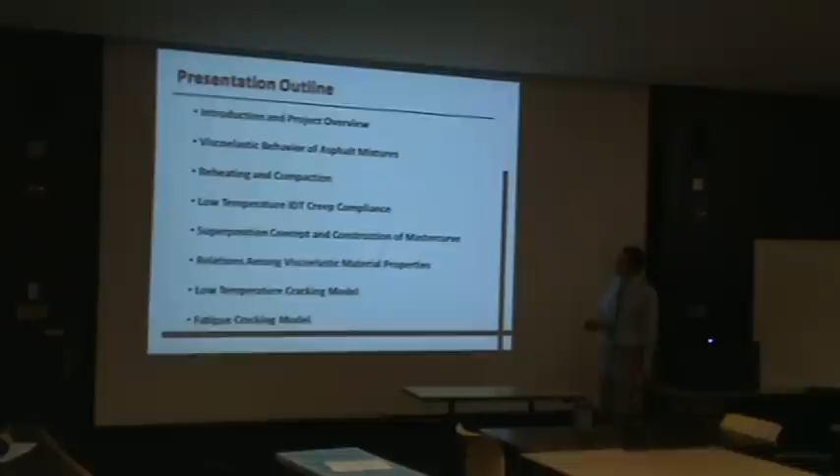This is the presentation outline. I'll talk a little bit about introduction.

What is RAP? RAP is reclaimed asphalt pavement, recycled asphalt. The RAP is generated when they mill old pavement, and then they move the RAP to landfills.

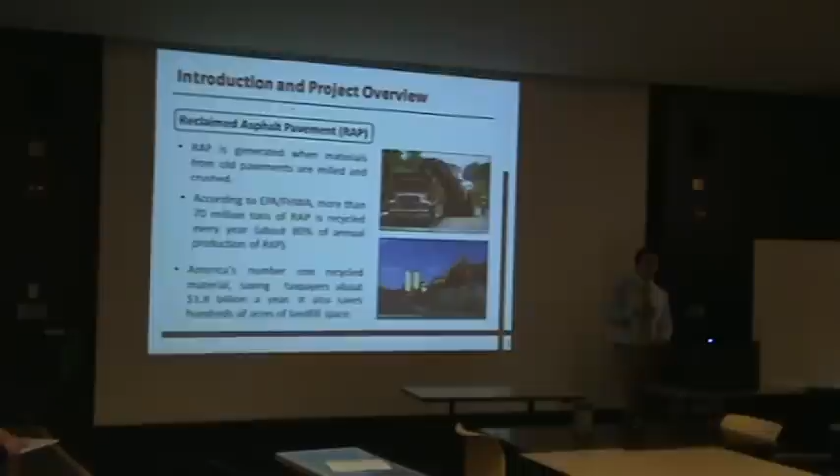According to EPA and FHWA, more than 70 million tons of RAP is recycled every year. About 80%, which makes it the material number one to be recycled in the US. And it saves $1.8 billion every year and hundreds of acres of landfills.

My project is about high RAP, not regular RAP. What's the difference? When we talk about RAP, it's whatever less than 20% RAP in the new mixture. Anything above 25% is called a high RAP mixture.

Actually, recycling started in 1970. The DOTs nowadays are very comfortable with recycling low content of RAP, less than 20%.

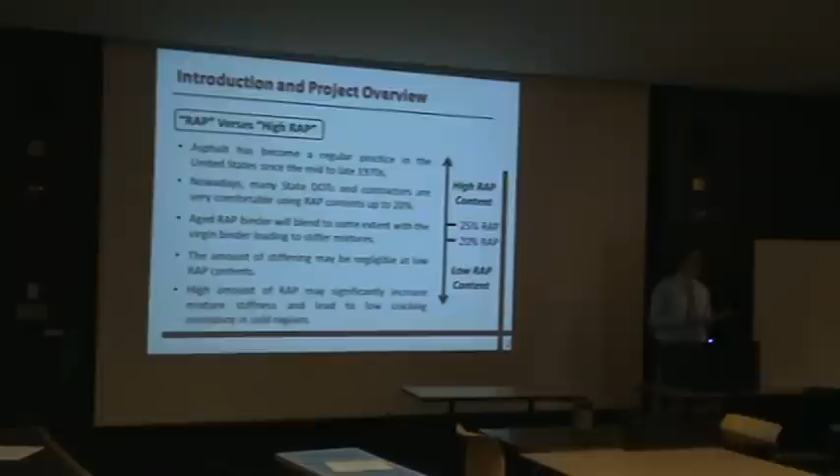But at low RAP content, the blending between the binder of the RAP and the virgin binder in the mix tends to make the mixture stiffer. The amount of stiffening at low RAP content will not affect the overall behavior of the material. However, at high RAP content, the blending and the stiffening of the material will be significant.

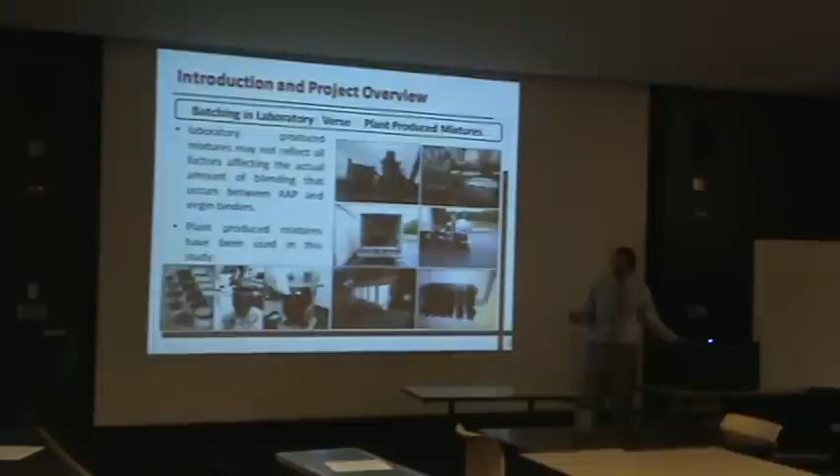In my project, I was using plant-produced mixture instead of batching in laboratory. What's the difference? The regular procedure of research is doing batching in laboratory. They make sieving, and then they add the RAP, they add binder, and then they mix. So they prepare the mixture in the lab.

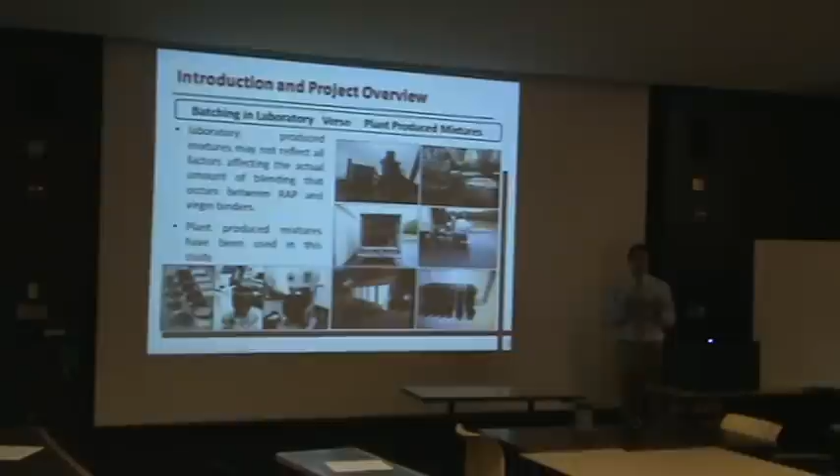However, the blending between the binder in the RAP and the virgin binder depends on a lot of things that happen in the plant itself. It depends on the mixture type, the amount of mixing, the temperature of mixing, and the plant type. So all this stuff, if we are using batching plant in laboratory, will not be representing the real pavement.

The material I used here came from 3 different states: New York, New Hampshire, and Vermont, from 2 different companies, and I used 2 different plant mixtures from batch plant and drum plant.

And I used 4 different binder grades, which is the grading by Superpave for the binder, and I used different amounts of RAP in the mixtures. So I used 0, virgin material, and then 20%, which is the regular practice nowadays, and then I wanted to see what would happen if we used 30% or 40% instead.

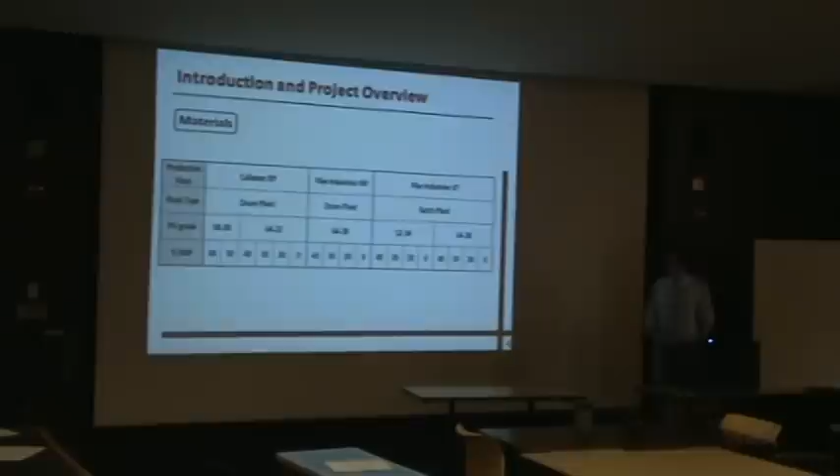What is the problem of RAP and what's the problem of stiffening the material? Material which is stiffer will tend to crack faster. So low temperature cracking and fatigue cracking will be a big issue.

And also, this project was especially for northeast of the US, and the northeast is a colder region, as you know, and rutting gets more susceptible in hot regions.

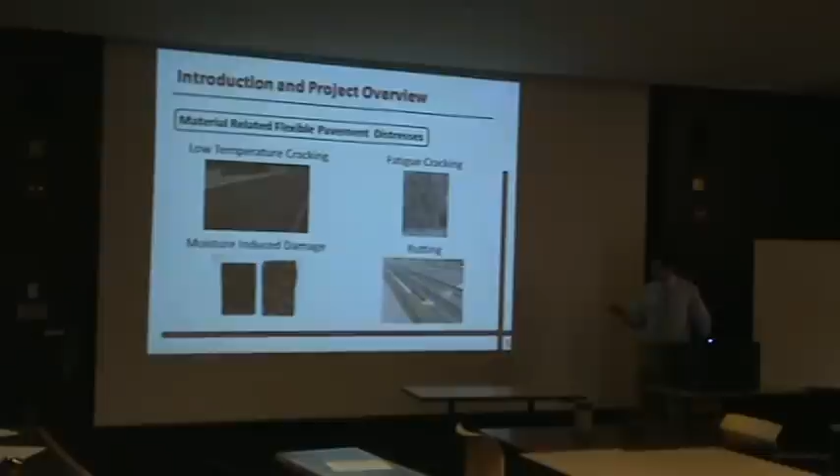This project was a pooled fund project, and we were working with North Carolina State University, UMass Dartmouth, and Rutgers University, Pike Industries Recycling, and FHWA. So this is the overview of the project.

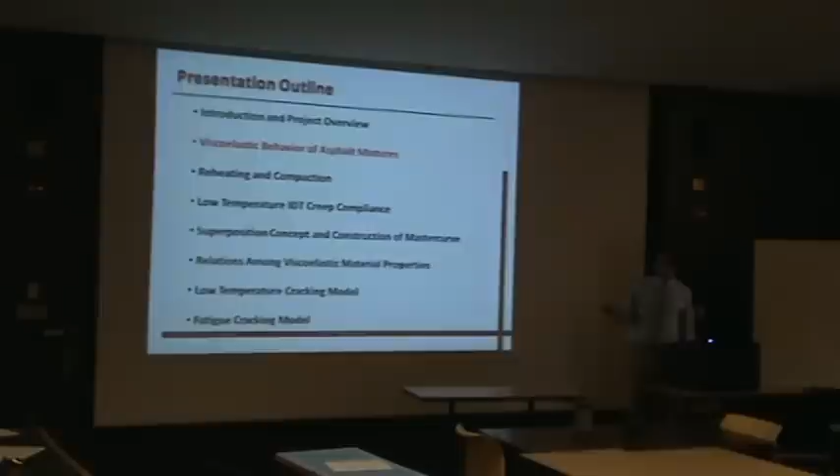I want to talk about the viscoelastic behavior of asphalt mixture. Actually, when we talk about any civil material we used to use, it's elastic. So the deformation depends on the stiffness of the material and the applied load.

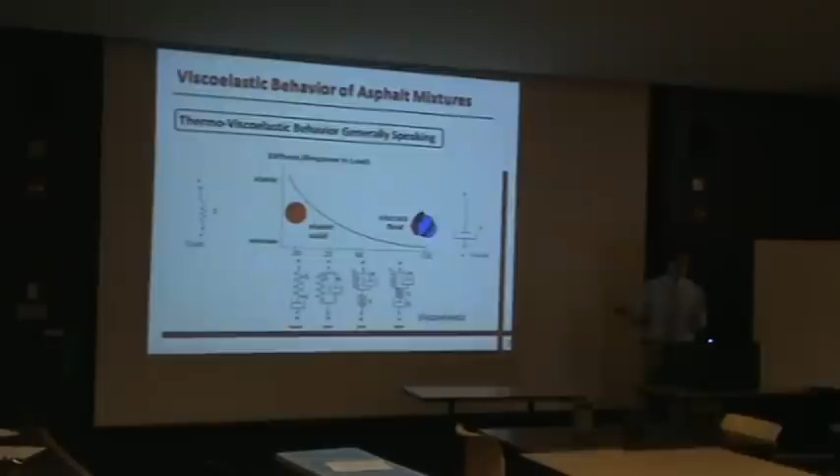However, asphalt is a viscoelastic material. So it's not pure elastic, it's not pure viscous, it's something between. And it depends on the temperature. So we call it thermo-viscoelastic material.

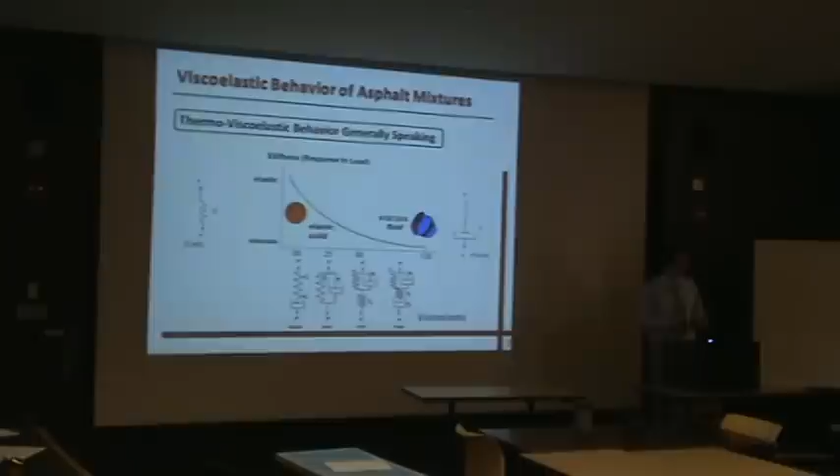At lower temperature, it tends to behave like rubber. At higher temperature, it tends to be a viscous fluid like honey or any viscous fluid.

It's not only dependent on temperature, but it also depends on time of loading. So we are not only concerned about the magnitude of loading, but we are concerned about the time of loading, because the response of the material after 1 hour, for example, at 25 degrees C will be that much. After 10 hours, it will be that much. So the deformation, for example, under any load will be dependent on time of loading itself.

So now we have 4 things: we have the magnitude of loading, we have the temperature, we have the stiffness of the material, and we have the time of loading.

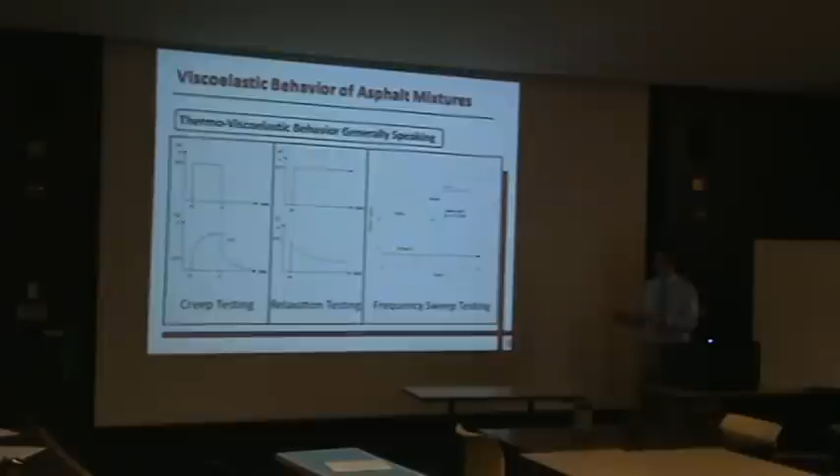So when we test this material, we need to control the load or the deformation, plus we have to control the temperature and the time of loading. That's why, for example, to test a viscoelastic material, we have creep test, relaxation test, and frequency sweep test. All these tests involve controlling temperature and controlling time of loading.

In creep test, we apply constant stress, and the strain will increase with time. At relaxation, we apply constant strain, and the stress will decrease with time. In frequency sweep testing, we apply sinusoidal loading, so the stress will be sinusoidal, and the strain will be shifted a little bit from the stress. There is a time lag, which is another property of the viscoelastic material, between the stress and the strain. So these are the tests we use for viscoelastic material.

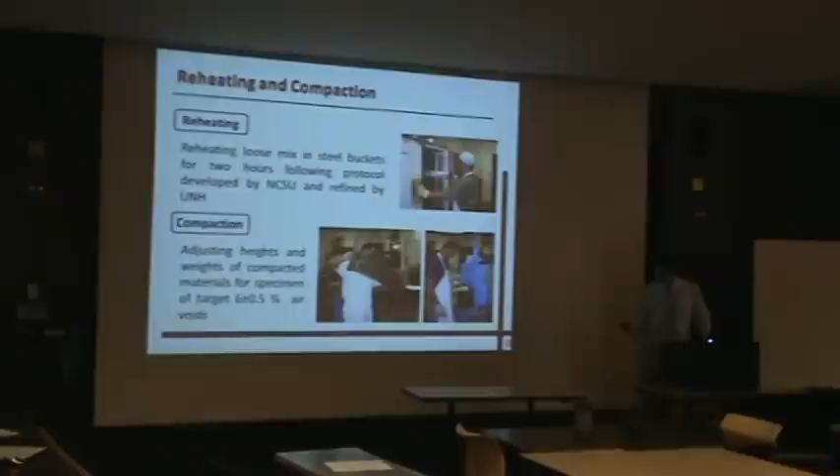Preparing specimen in lab: I get the material from the plant, it's mixed in the plant, in a steel bucket, airtight, and then I reheat it in the lab for 2 hours, following protocol by North Carolina State University. Then we compact the material. When I compact by the gyratory compactor, I adjust the height and the weights so that I can get 6 plus or minus 0.5% air voids.

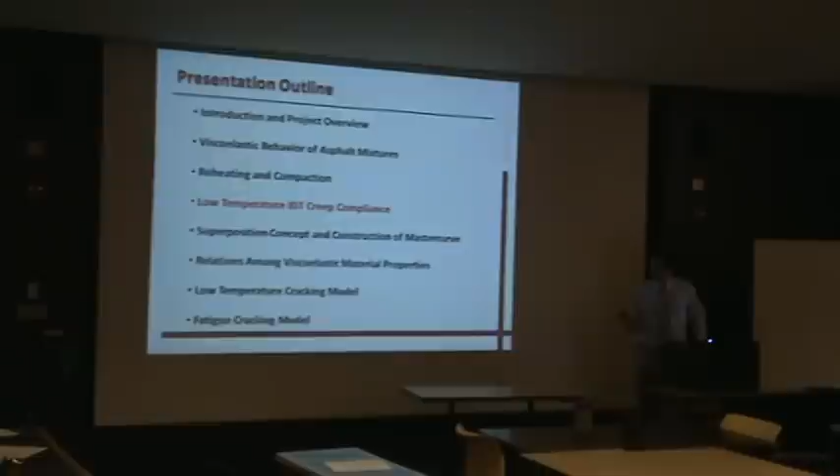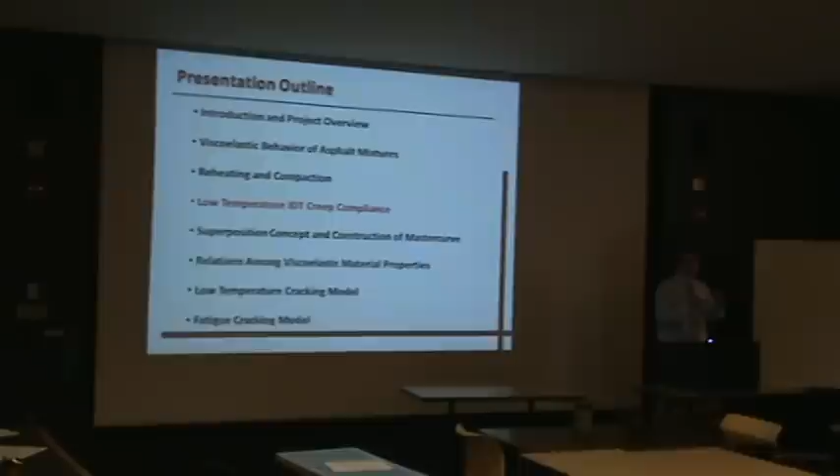After that, the first test I'm doing is the creep test, which I use the first specimen for. In the creep test, I apply constant stress and read the strain, and I expect the strain to go up a little.

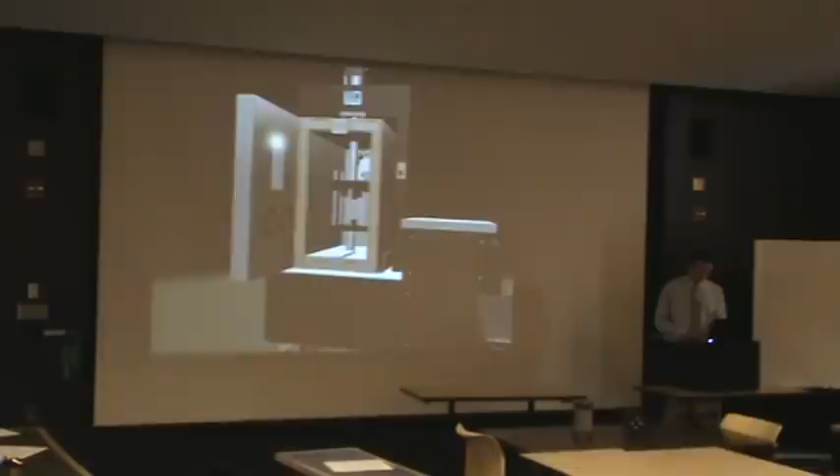We use nitrogen gas to cool down the temperature chamber. This is the jig, and we put the specimen inside this jig, so it's an indirect tension test. We apply compression in the vertical direction and get tension in the horizontal direction.

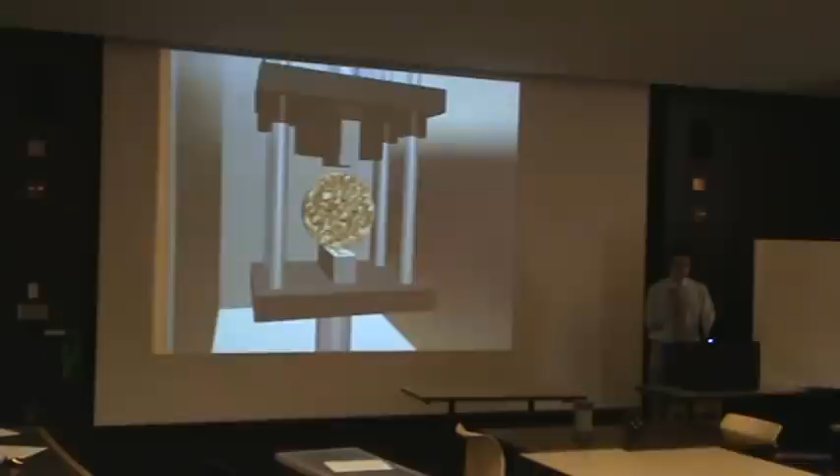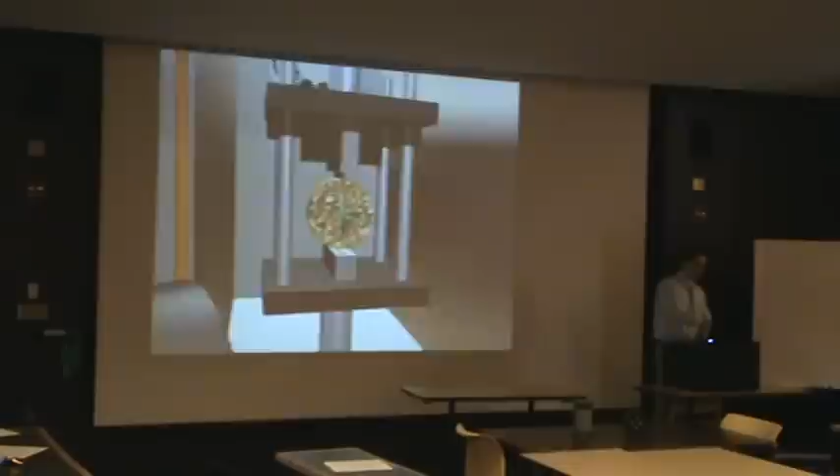Then we mount the LVDT, linear variable transducers. In the picture this is a resistive transducer, but we put LVDT on the specimen. Then we read the testing, the vertical and horizontal deformations on the specimen.

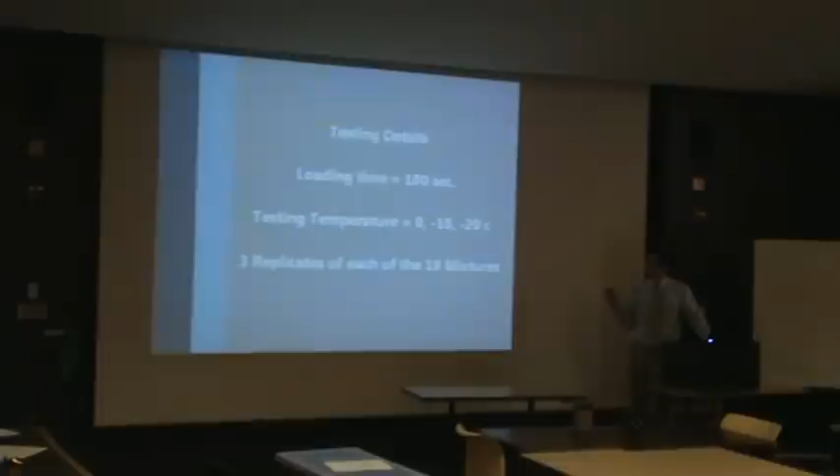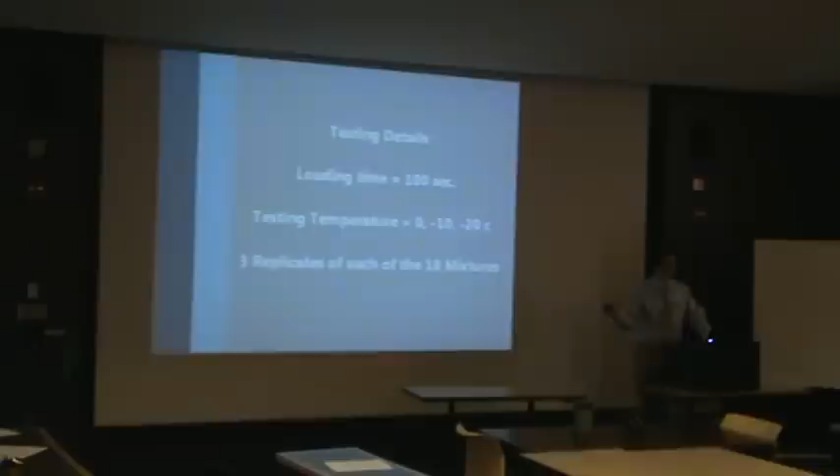The testing details: loading time will be 100 seconds, so we control the time here for 100 seconds. Temperature - I will repeat the same test at 0, -10, and -20 degrees C, and then 3 replicates are used from each mix. I have 18 mixtures, so 3 replicates times 18 mixtures, done at 3 different temperatures.

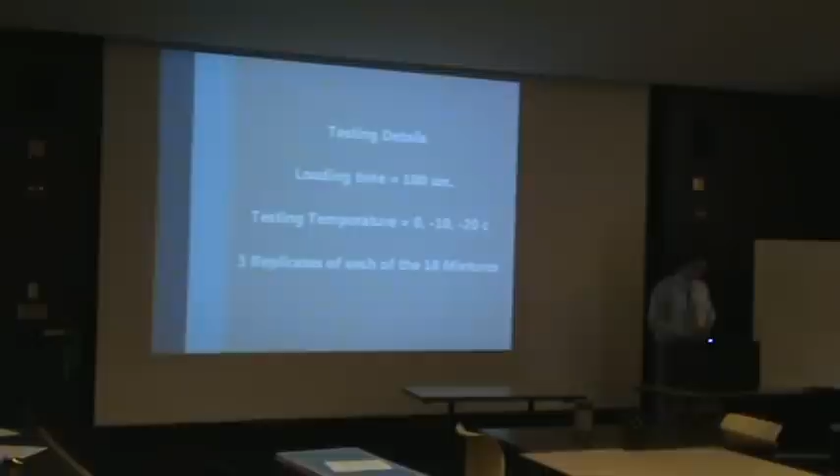The other thing I'm very picky about is choosing the load. I'm not choosing the same load for all mixtures and replicates, but I choose the load which gives me a horizontal strain not more than 300 microstrain and not less than 50 microstrain. Why? Above 300 microstrain, the material will not be linear viscoelastic, it will be non-linear, so I want to avoid this non-linearity. And why more than 50 microstrain? To differentiate between the signal itself and the noise in the system.

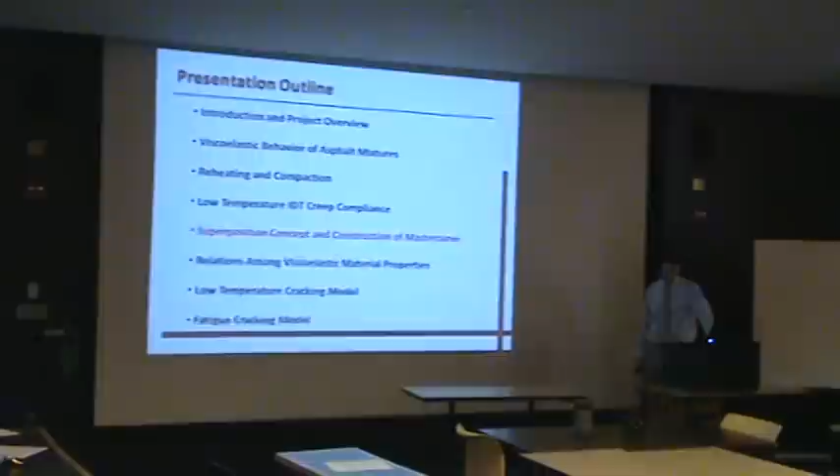The other thing I want to talk about, after I do the creep test, there is something called the superposition concept to construct the master curve for creep.

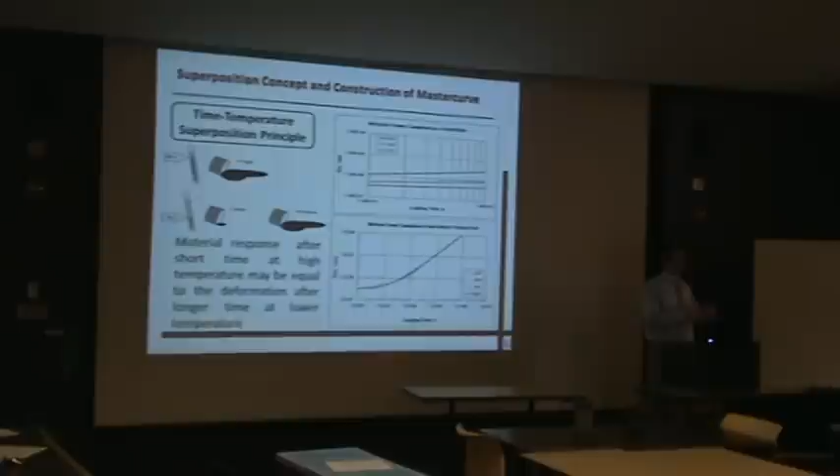Again, the same picture - I like this picture. The behavior of the material depends on temperature and time, but there is something called the time-temperature superposition principle, which means the response of the material could be the same under high temperature with short loading time versus lower temperature and longer loading time. So I can shift the curve. Those are the 3 curves I get from 0, -10, -20 degrees C testing, and then I can shift them using time-temperature superposition. Instead of talking about time, I use something called reduced time, which is imaginary, so I can take into consideration the time-temperature superposition.

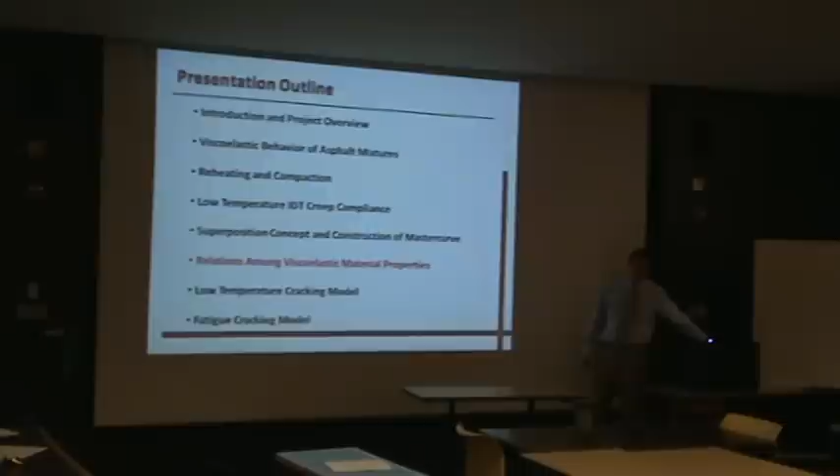After constructing the master curve and applying the superposition concept, there is some relation between viscoelastic material properties. As I said, there is creep test, relaxation test, and dynamic modulus from cyclic loading. Actually, the 3 properties are material properties, so they should be related.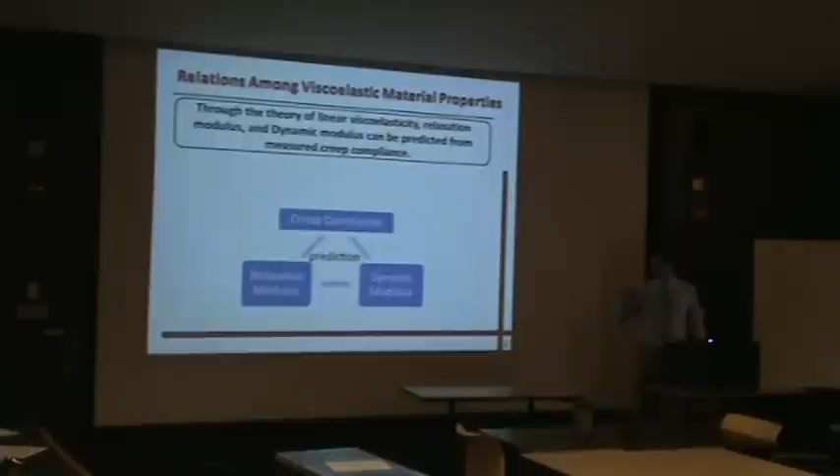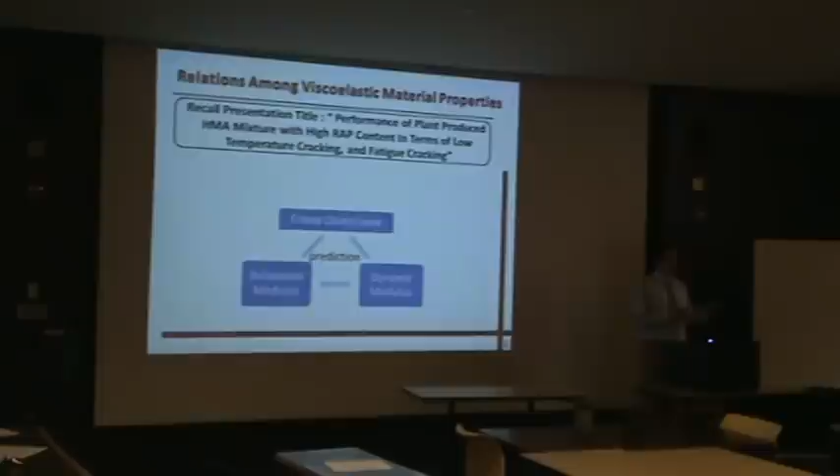There are mathematical models to predict or use creep, relaxation, and dynamic modulus interchangeably between the three. After I get the creep data, I predict relaxation, I predict dynamic modulus, and after these predictions, I have all three.

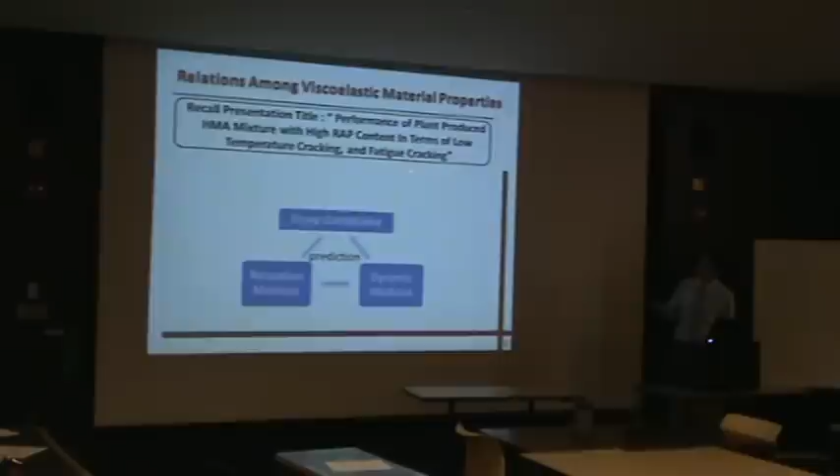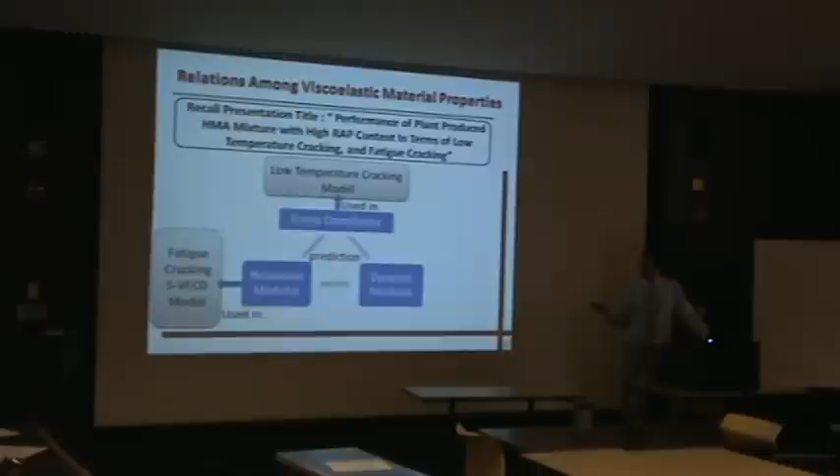So what's the reason for all this? Going back to the title of the research, it's testing the performance of these materials in terms of low temperature cracking and fatigue cracking. I'll use the creep compliance in a low temperature cracking model, and the relaxation modulus in the fatigue cracking model. So now I have low temperature and fatigue covered.

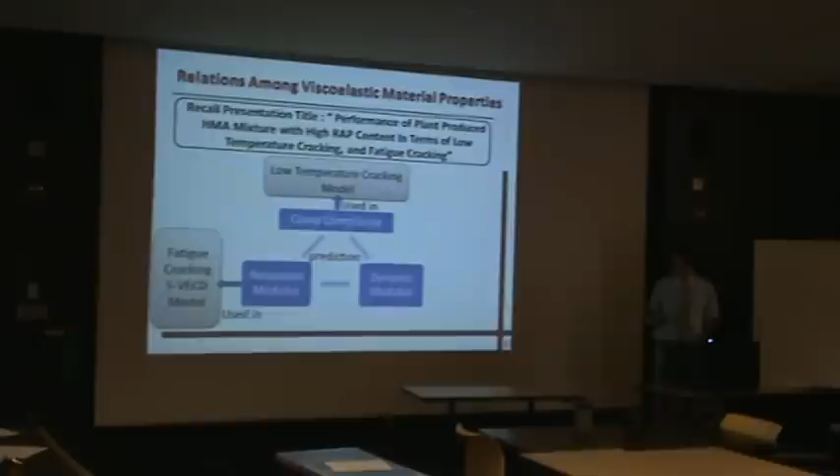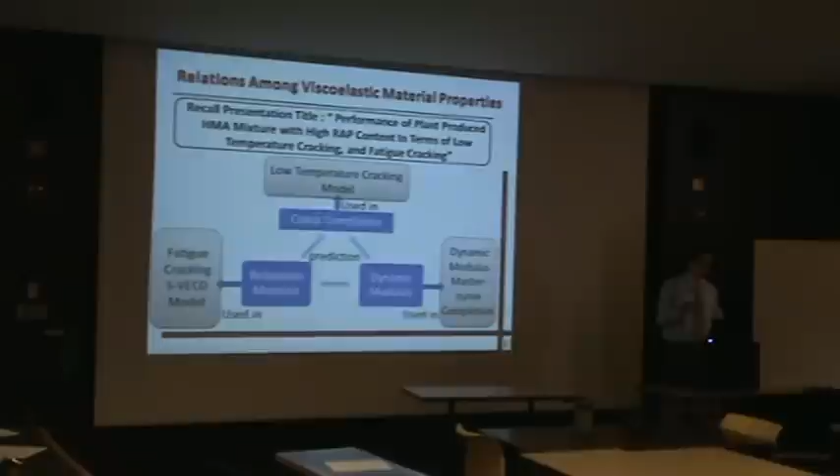Why do I need the dynamic modulus? I get the data for dynamic modulus from Rutgers University, and their machine can't go down to -10 or -20 degrees C. It only goes down to 4 degrees C. So I use the dynamic modulus predicted from the creep at low temperature to complete the dynamic modulus master curve, using the superposition concept I just talked about.

This is the model for the crack. The tensile stress comes from contraction of the pavement - this part tends to contract, that's why the stress happens, and the stress will be higher at the top of the pavement.

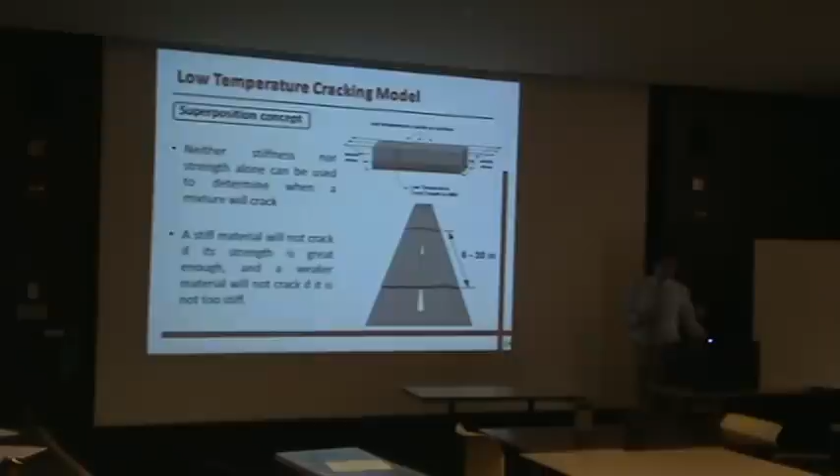Neither the stiffness nor the strength of the material alone can characterize the cracking properties. I have the stiffness from the creep test, but I don't know the strength. Why can't either one help with the cracking model? Because a high strength material may not crack if it's flexible, and a weaker material will not crack if the stiffness is not very high.

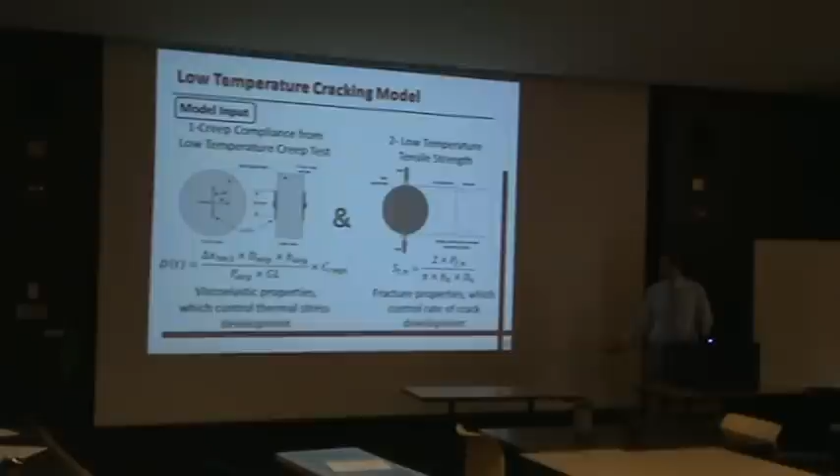So besides having the creep compliance test, I have to do a low temperature tensile strength test, also on the same specimen, doing IDT test again, but at negative 10 degrees C, applying monotonic loading until cracking of the specimen. So this is the low temperature cracking.

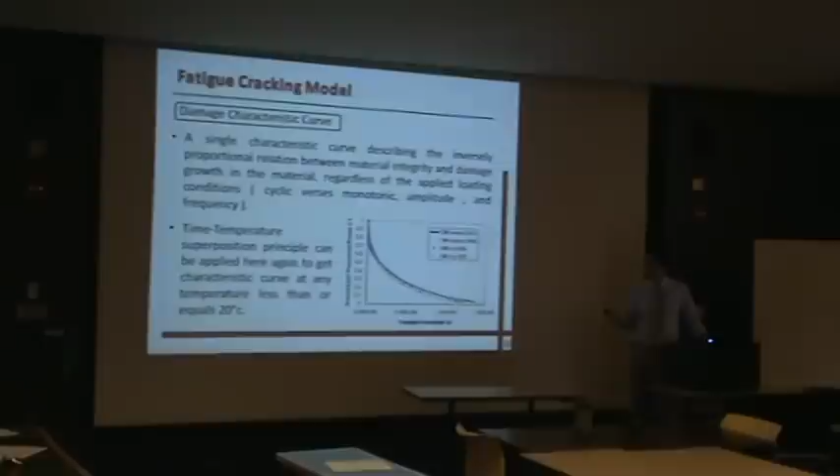For the fatigue cracking, the advantage of having the model is to get something called the characteristic curve, C versus S, which describes how damage will propagate in the material, or how the propagation of damage affects the overall stiffness. This characteristic curve is very good because it doesn't depend on the type of loading or the frequency of the load or anything - it should be the same.

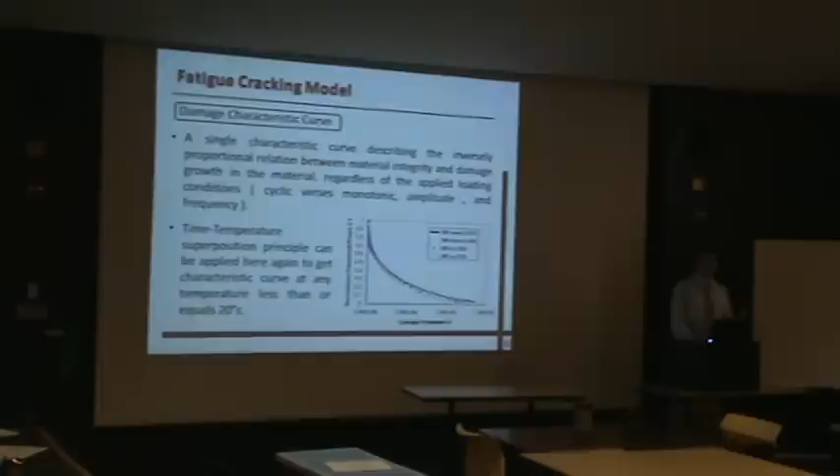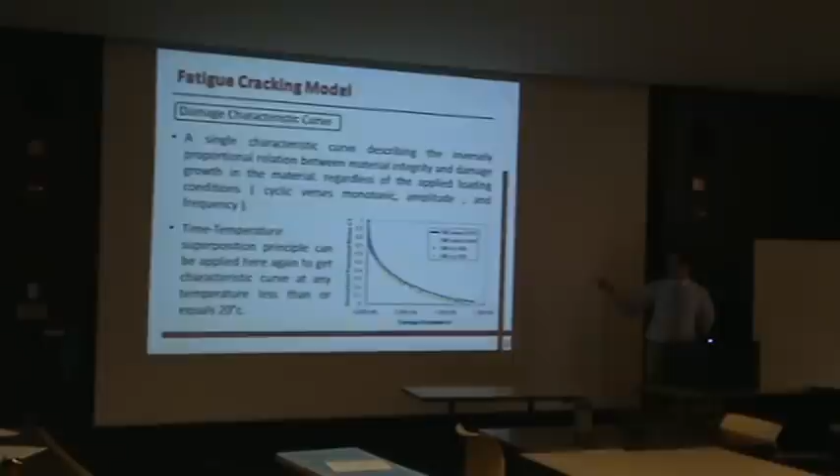Whether it's cyclic versus monotonic, or whatever the amplitude or frequency of loading, it ends up with the same curve. Using the superposition concept, I can shift this curve and get the properties of the material at any other temperature. So if you need to know the properties or shape of this material or pavement at a certain temperature, after 10 years under certain traffic, you can know what damage will happen using the characteristic curve.

Using the characteristic curve involves a model called the simplified viscoelastic continuum damage approach. The continuum damage approach means instead of looking at the micro cracks in the specimen, I deal with the overall material, and say that the overall stiffness of the material goes down due to the micro cracks when they happen.

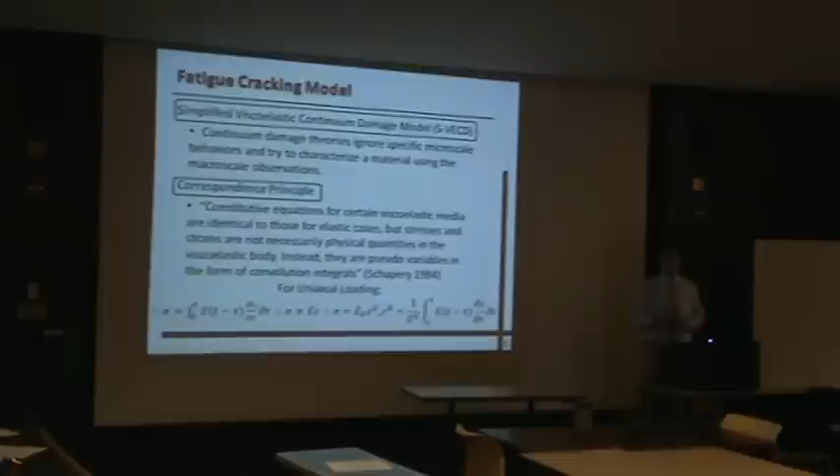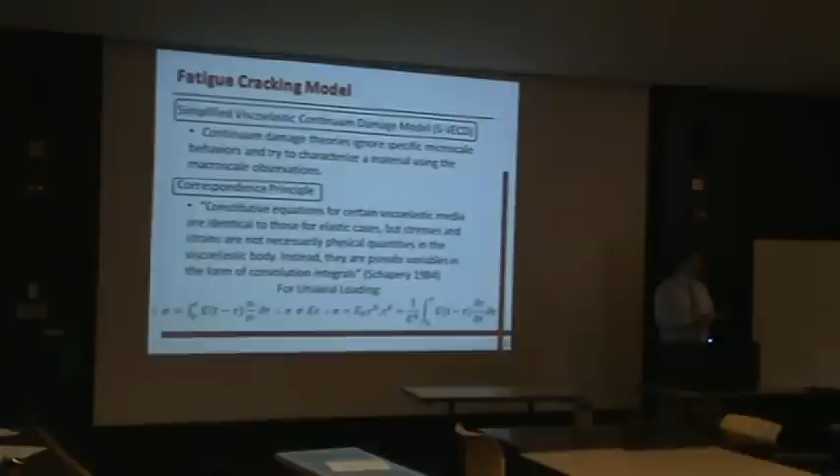There is also something called the correspondence principle, which changes the viscoelastic problem to an elastic problem. I can apply Hooke's law, for example, by using imaginary or pseudo strain instead of the real stress or real strain. By using the pseudo strain, I can apply elastic problem solutions like Hooke's law and other elastic properties. This was developed by Schapery.

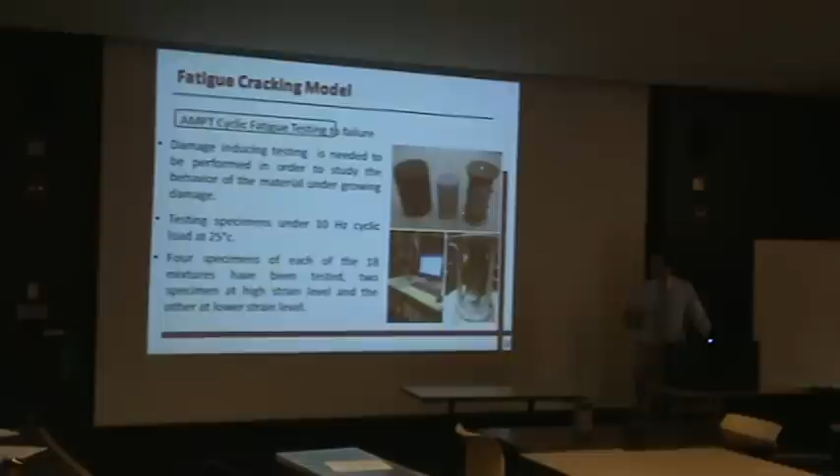This is the testing using the AMPT, done at 10 Hertz cyclic loading, 25 degrees C, until fracture of the specimen.